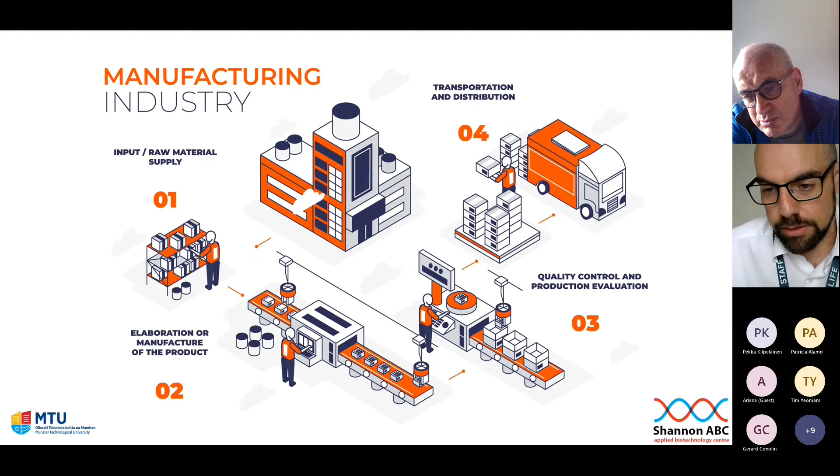Today we're going to talk about cosmetics going from the product design to the final product that you can find on the shelf or in people's houses. Industrialization happens in one specific phase, but it really starts with development, so it's a continuous flow. Whoever has attended other NACO events will probably be familiar with some of this already, but it's to make sense of everything being interconnected. We're going to speak about incoming goods and industrialization, then quality checks, filling, and packing.

Scaling up starts during the development phase, with the selection of raw materials and components. If you are a brand owner who wants to launch your own product, you need to know what raw materials go in the finished product and how you want to sell it: what the final packaging is going to look like. Everything has an impact in terms of cost. So formulation development is where this information starts to be fed to the customer.

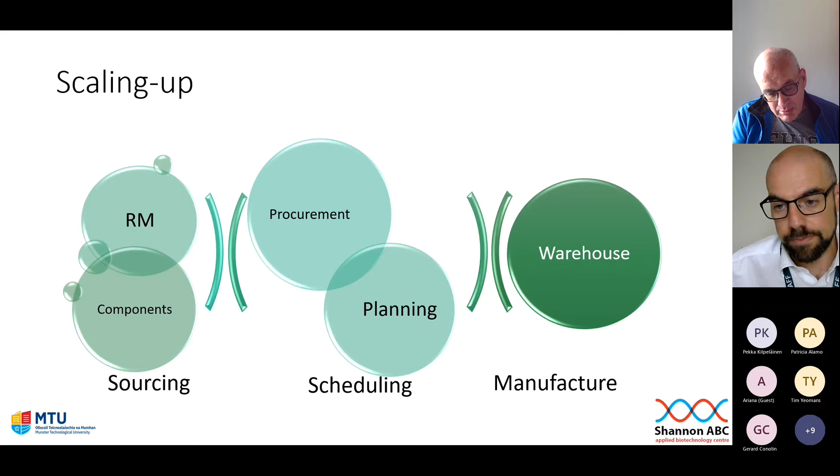The warehouse has this critical role. It's a neuralgic point of any factory, because a warehouse is where raw materials are stored as they are delivered. Same way the components are stored when they're delivered. And as I said, if we're talking about thousands of units, it will take space, at least at the very beginning; the more you use, the smaller you can downsize. But at the beginning, you need to have enough space for everything separate, but also when things are put together.

So when the bulk is made, you need to have space to return the raw materials that are not used, because remember the minimum order quantity, but also the bulk between making and filling. It needs to be stored, it can't be stored on the floor. It has to go back to the warehouse. And the same way, once the bulk is filled, the unused packaging goes back in the warehouse, and the finished products are back in the warehouse, waiting for the delivery truck to collect them and ship them out.

So for this reason, the warehouse is also crucial in terms of flow of materials and people. It's important to have a proper idea of what needs to move in order for, first of all, people to be safe, but also for the work to be efficient. So we're talking about the warehouse as the first port of call for incoming goods.

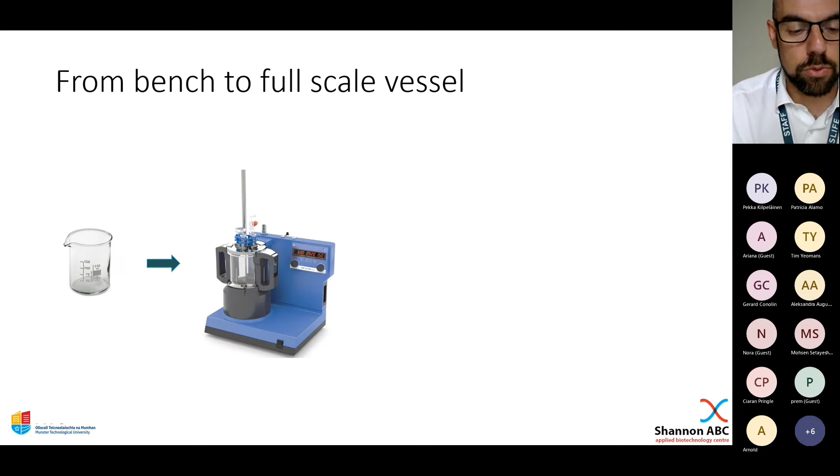So you can't really play around with the type of mixing, or you can't stick your spatula in the beaker to give the extra bit of mixing and help scrape the walls. But at the same time, you see how long the mixing of the components needs to happen, and have an understanding of how your mixing time in the lab reflects when scaling up. And this one, obviously, is not an industrial setup.

You then move up to a more industrial setup, a proper closed one with no see-through containers. Usually these kinds of vessels have a small opening, a small window, and a light inside. But between splashes and the fact that you can't really move or go around it, it's very hard to understand what goes on in the vessel.

So the ideal scenario is when your formulator and your operator speak at this level, because the formulator brings the expertise from a formulation point of view and how the ingredients interact with each other, and the operator brings the knowledge of what's going to happen in the factory. So at this point, the operator should know what goes on inside because he has seen it here. This phase is not available everywhere, but the expertise at both ends is. So it's just a matter of making sure that the communication happens.

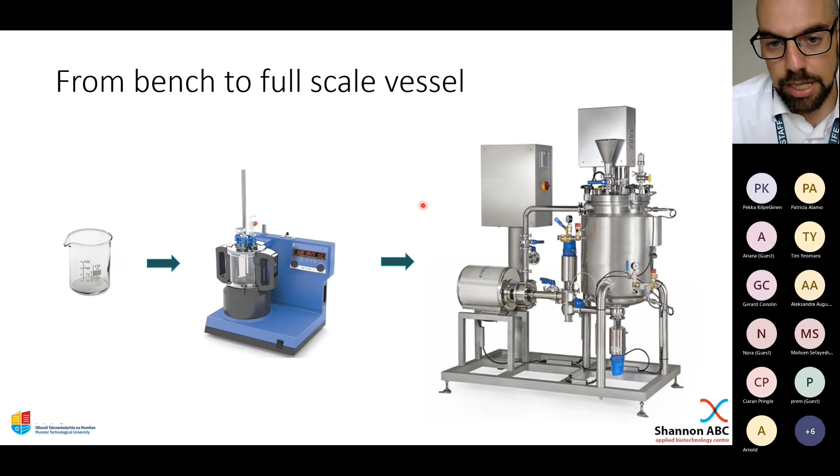The key questions for upscaling are: what will I use in terms of vessel size, the size of each phase, what type of mixing do I have in the vessel, and is there a vacuum? And these are all fixed elements. The vessel gives you a lot less freedom to interchange any of these elements. Your vessel is efficient between 30% or 40% of its nominal volume to 90% of its nominal volume. So depending on how big your vessel is, you need to know how big the batch is going to be.

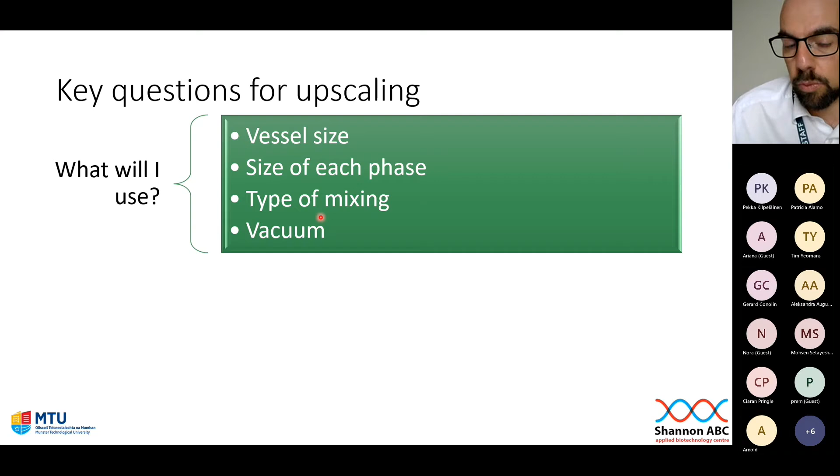If the batch falls outside that ideal window, you have to start to think of plan Bs in case something goes wrong. And together with it, the size of each phase, because if your total batch size is 800 kilos and you have a 1 ton vessel, it's fine. But if your first phase is only 100 kilos, then it's not okay. I'll show it later on in a little diagram what I mean by this. The other question is, how will I make it?

So what's the most efficient way of ensuring that the product that I see from the lab is not only reproducible, but reproduced with the same quality, if not better quality, to an acceptable standard for the final user.

So it's the number of phases and the order of addition of the phases. Is recirculation needed, and is it feasible with the design and setup in the factory? What's the time energy input compared to what I've seen in the lab? And what's the mixing speed, again, in reference to the lab environment?

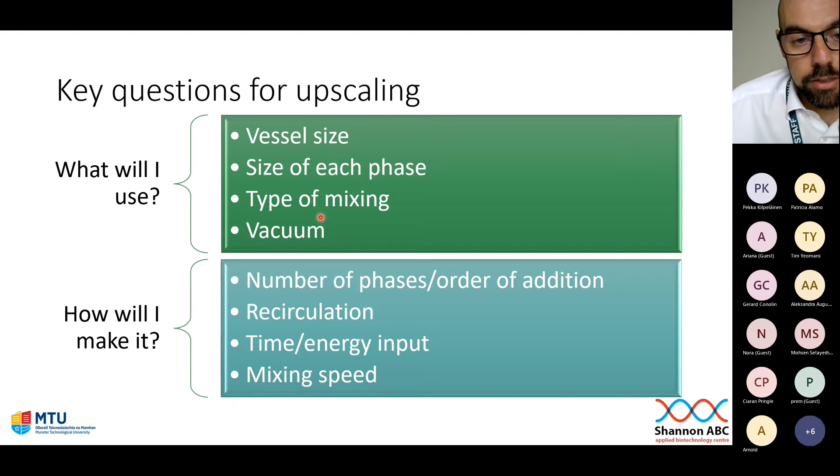So in terms of vessel, you could come across anything from glorified pots to engineering masterpieces. So this is the first example. I think it's pretty obvious. And this is, for want of better words, not very different from what my grandma used to do to cook pasta in camps. But basically, it's a stainless steel vessel where mixing needs to happen. With the flexibility of this type of vessel, you still have limitations.

It's the limitation in terms of what type of products you can make, because anything more complex than liquids will cause issues. In terms of volumes, because these type of vessels, probably the biggest you can see is 300 or 400 kilos. So if you need a bigger size, you can't really expect to do X number of batches on this. And then the type of mixing as well.

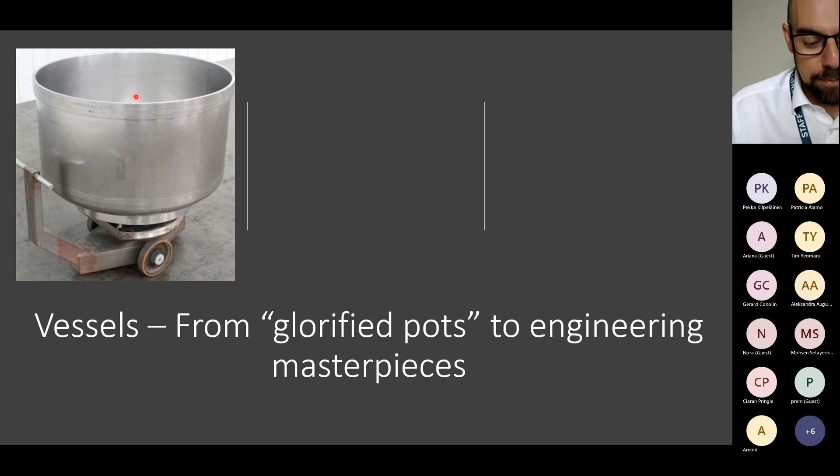You need to know the number of phases of your production, because if this is the setup that you have in your factory, the operator needs to be working in safe conditions. And if you have 15 different phases, he can't be surrounded by so many different barrels and containers with a lot of letters, usually used for phases from A to X. It causes a higher potential of making mistakes, and mistakes in this case are harder to track and could have a bigger consequence than just scrapping a lab batch.

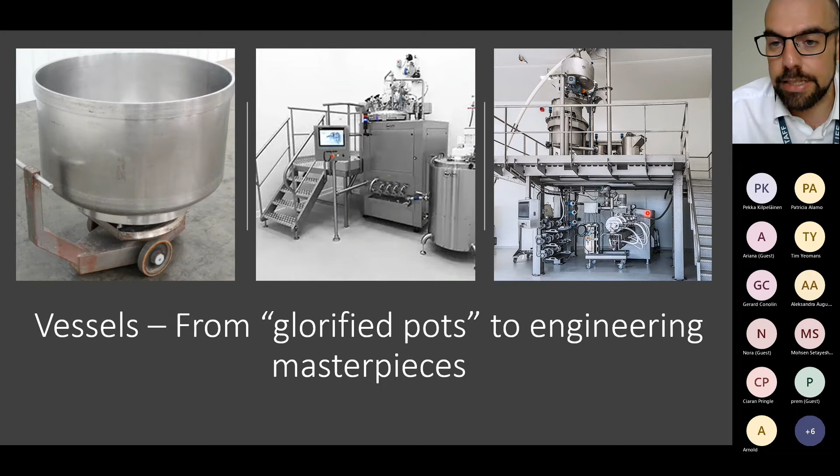Then by increasing the complexity of the type of products, probably this setup on the right hand side is something pharma, quasi-pharma. You can see there's a lot of sophistication. I wouldn't be surprised if the commands or the software that runs the machine is much harder and more complex than the previous two cases. You have many elements that you can control, but at the same time many elements that restrict you in how you want the ingredients in the vessel to be mixed or combined together.

When it comes to mixing, I think this is one of the biggest, if not the biggest, difference between lab and manufacture. Lab mixing gives you all these options. So you have propellers, 4 blades, 3 blades, 3 blades with Teflon, 2 blades. Then you have your dissolvers. You can have 3 blades that give a different kind of flow

of the liquids inside your beaker. You can have a paddle stirrer that gives yet another different flow, and you have your best friend that when you upscale is your worst enemy, which is a spatula, because you can stick it anywhere, you can give it a quick mix, but it's very hard to then quantify how that mix can be reproducible in the bigger scale.

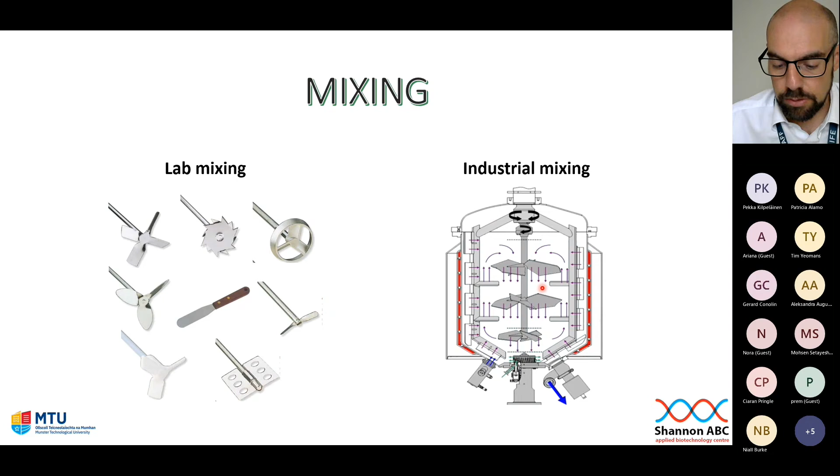Anything between this dotted line and this, so the vast majority of the space of the vessel, gets a good, proper mixing. Anything above the top dotted line may cause issues if you have to apply vacuum, or if you require energetic mixing, you could have splashes, and you end up losing some product on the top, or on the side, not being properly mixed. So the vessel size is important to know beforehand.

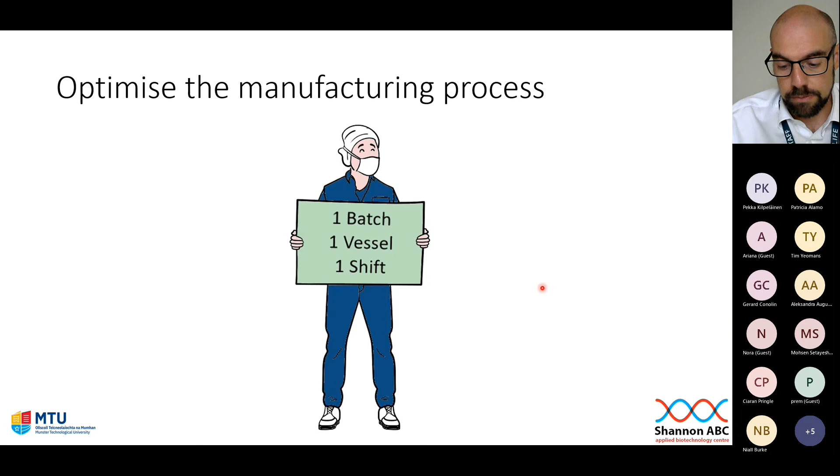Optimizing manufacturing process. So the ideal scenario is that one operator is happy if he knows that he has to make one batch in one vessel in his one shift of work. So the one shift needs to take into account the quality control on the empty vessel, usually micro checks, or just checking that whatever was made before, there's no residues.

Especially if you operate in an industry with colors or dyes. You don't want to make something like a mascara and then afterwards a white skincare product, because it's going to be very hard to ensure that the skincare product is going to be white. So all these checks need to happen, then obviously manufacture and the release of the batch within the same shift.

Depending on the factory, big factories have their own team for cleaning the vessel. So the cleaning of the vessel can happen in a different shift by a different team, but the batch needs to be released within that shift.

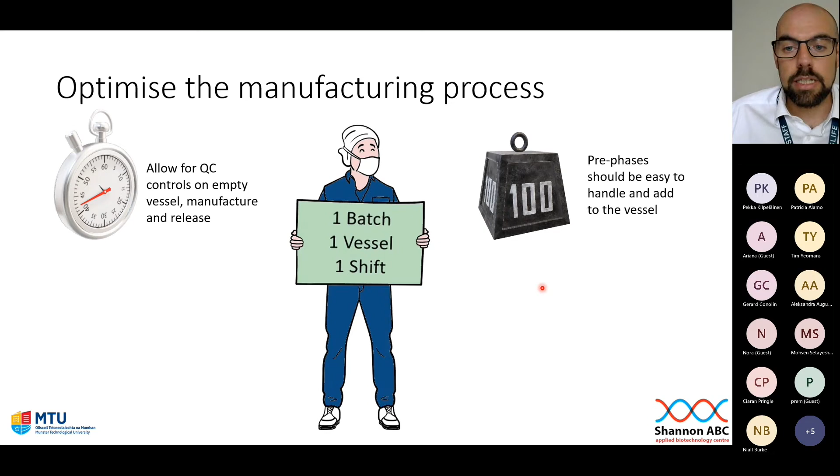The pre-phases should be easy to handle and add to the vessel. So I was mentioning pre-phases before. Your pre-phase should be something that a normal operator can lift on their own in safe conditions. If you're making a pre-phase of 200 kilos, obviously the operator cannot do it on their own. He can do it, but he needs to get the tools to make it happen. It will take more time, so that jeopardizes the one shift condition.

The ingredients must be added to the vessel in the proper order, and this is mainly a concern if you have heat-sensitive ingredients: you need to know that after they're added to the vessel, you're restricted in the temperature you can have. If you have shear-sensitive ingredients, you know that after they're added to the vessel, these ingredients cannot undergo very high-energy mixing. So the formulator and the operator, in their communication on how to make the batch, need to be aware of this and find the best compromise in order to optimize the manufacturing process.

And last but not least, clear instructions for the operator, capturing the timing, the mixing, so what type of mixing, the speed of mixing, what temperature, and what happens between one phase and the next. The more detail the operator has, the clearer it is, and the more efficient he is in making things.

If you're saying that you need to mix for 10 minutes and then below 40 degrees add another phase, he needs to know how to get to 40 degrees, how long he needs to get to 40 degrees, and what happens to the vessel. Is there any sort of agitation going on while the bulk goes from whichever temperature to 40 degrees? So this information needs to be shared and agreed before the operator even starts to upload any ingredient or any phase to the vessel.

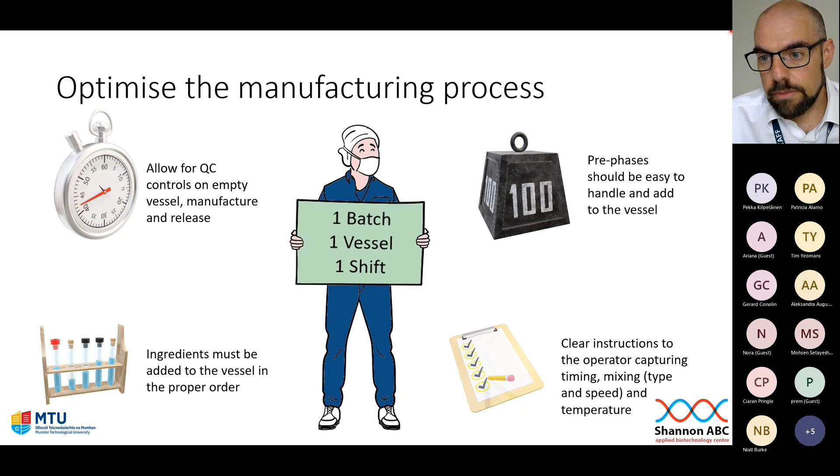So bearing in mind that making cosmetics is not as easy as it may sound, there are bulks that are even more complex than normal to manufacture. And these bulks are the spa scrubs. All scrubs are kind of tricky because you need to make sure that the exfoliating agent is evenly distributed throughout the batch.

But in these cases, I'm speaking about anhydrous products. So products that don't contain any water; they're held together by the semi-solid crystalline structure that forms when waxes congeal and restructure. And the tricky bit is, once it's in this form, you know that the scrub is going to stay there, but the filling is tricky. You make it at high temperature to make sure that your waxes are melted, but at the same time they don't have the structure, so all your exfoliating agent drops to the bottom of the vessel. So you have to find a good mixing and a good way of bringing it down to the temperature where you're sure that the samples from the top and the bottom of the vessel are similar and comparable.

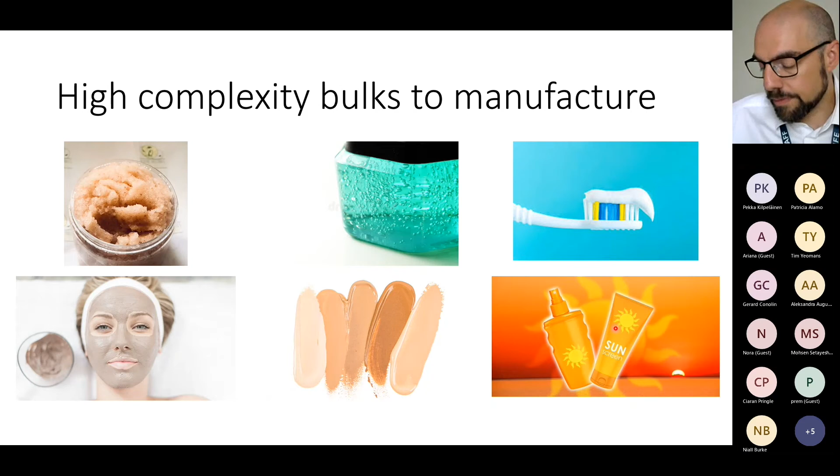Then I spoke about quality checks and the filling and packing. So quality checks for bulk is related very much to the standard that is made in the lab and very likely approved by the final customer. So the formulation needs to send a reference to the quality control as a standard. Critical parameters need to be agreed. And again, as I mentioned before, for raw materials, critical parameters are, for instance, the pH for many products, but not for anhydrous products. It doesn't make sense to speak about pH for a lipstick, for instance.

At the same time, viscosity is not something needed if you're making a liquid, because it's going to be water thin. It doesn't make sense to measure how thick something is. Density or specific gravity is something that is needed because of the implication in the filling process. Then specifications are required, especially for first productions. But for first production, they're really estimates, because your specifications are only a guidance for the quality control team to understand, is this product going to be fit for purpose within the packaging that it's going to be filled in.

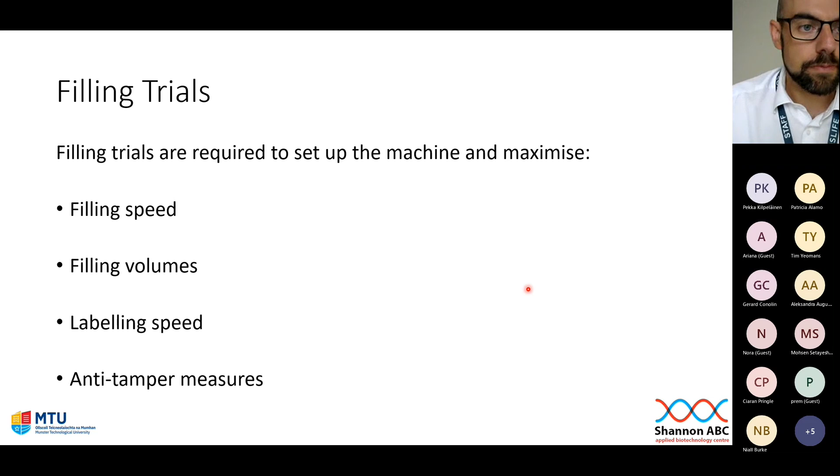The finished product has its own checks as well. There is a micro specification, because even if your bulk is not contaminated and it's pure, contamination could come from the packaging. So you just want to make sure that the finished product that goes on the shelves is safe for use and it's pure.